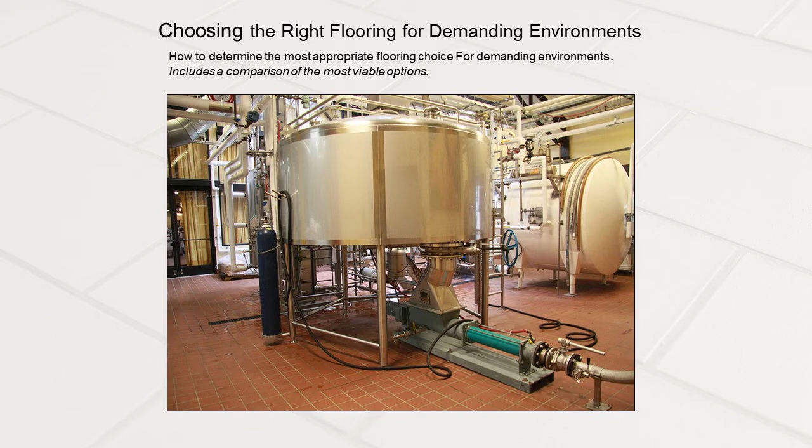So we'll get rolling. Metropolitan Ceramics, we've been around since 1866. We originally made paving bricks that have been known to be installed in the Indianapolis Motor Speedway, hence the Brickyard. We were one of the original vendors that provided paving bricks for the Indianapolis Motor Speedway. So we have a long history in the ceramic and brick making industry. Most recently, within the last half century, we've been making quarry tile.

And we're talking not only day in, day out foot traffic, but you're rolling carts across it. When we reference extreme temperatures, we're talking in and around fryers, in and around heat, in and around ovens, in and around cold and frozen storage areas as well. Needless to say, these areas are going to have a lot of moisture, a lot of wetness. It's just basically a very slippery environment.

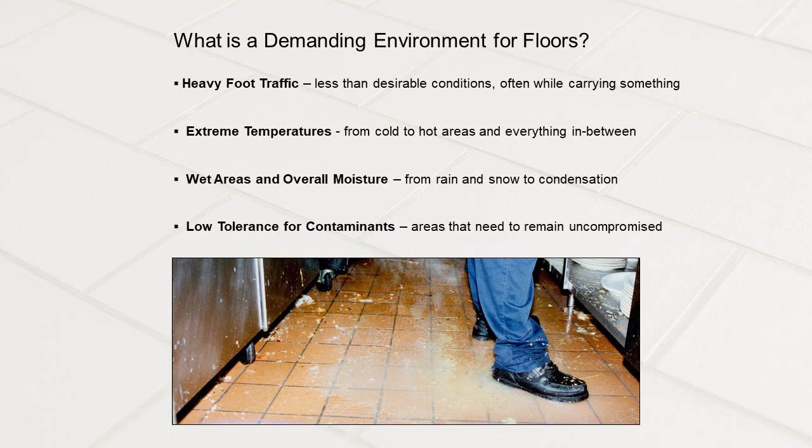Heavy industrial traffic, exposure to spills, must maintain an acceptable appearance overall. You want something that the customer is going to look at and basically say, that's not going to make me throw up or make this particular meal I'm eating that much less desirable. But as far as heavy industrial traffic, we're talking machinery rolling across it, heavy carts with casters, metal casters, rubber casters.

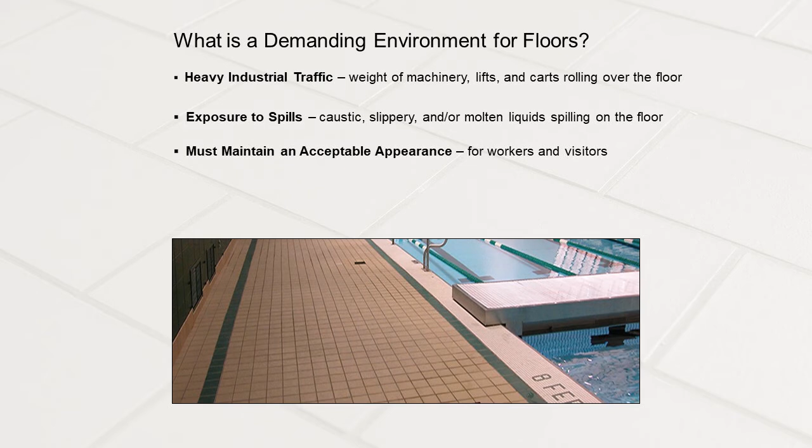This particular picture is a pool at Marshall University. And not only what's rolling across it to change out for events, but you have the contaminants of what's used to clean the pool, a pool deck, so it's exposed to bare feet. So you want something that's going to be extremely clean and extremely health conscious as well.

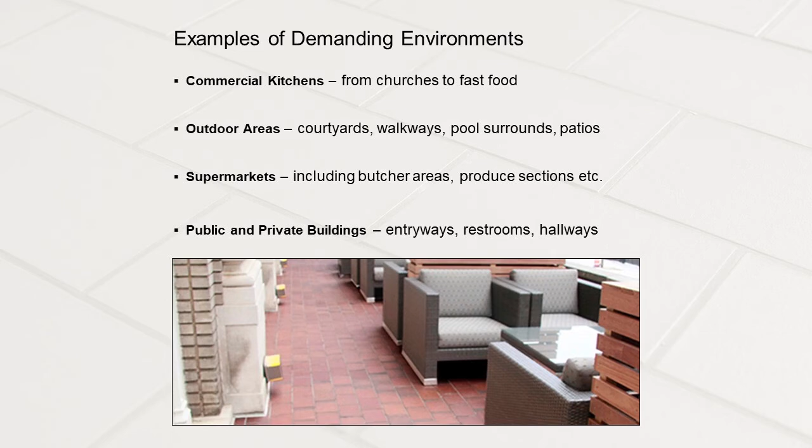Locker rooms, industrial applications, dealerships. Car dealerships, not only in the showroom areas, but the service bays themselves are very demanding environments where you have not only spills of oil and grease and other contaminants to clean, but you have cars and heavy traffic rolling across it. Locker rooms and restrooms as well. Schools and universities primarily use a quarry tile, or some type of ceramic, because of the durability of it overall.

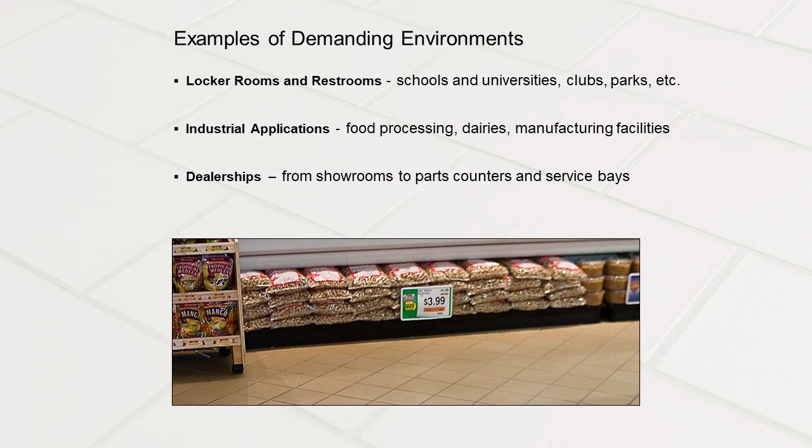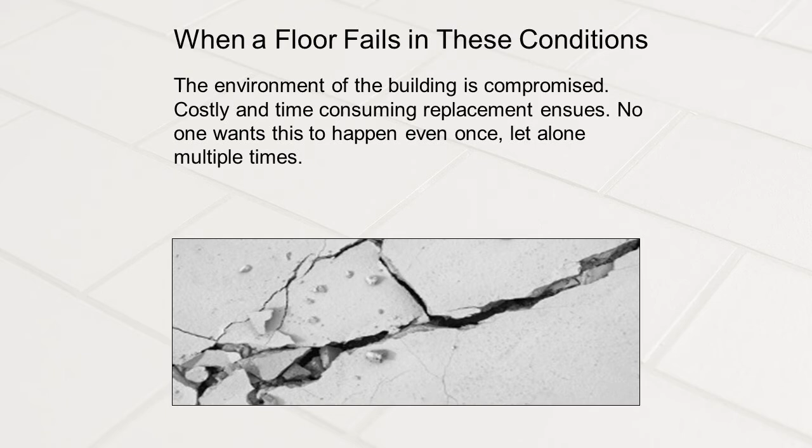When floors fail, you have many issues that happen. When a floor is compromised, either by way of the concrete itself underneath or something falling on it, you want something that's going to be as durable as you can get. This particular picture is basically a picture of a spalled piece of concrete. And this can happen with something falling on it or the fracture itself coming up from underneath.

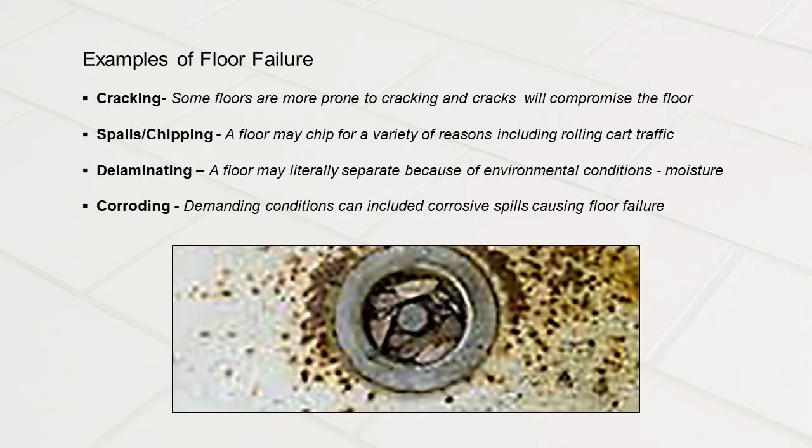Melting, surface wear, discoloration, and tearing mostly and primarily have to do with vinyl or rolled-on products. They rarely have to do with ceramic tile. So that's something that, again, is one of the benefits of ceramic tile.

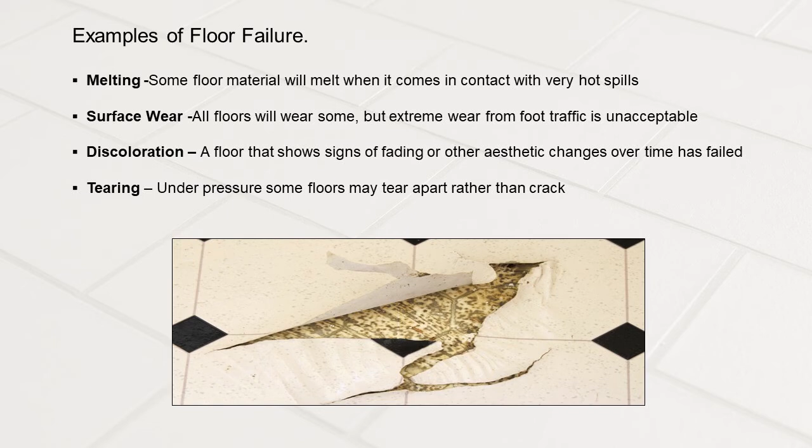The most successful floor that will not be compromised and will provide decades of service is primarily a ceramic tile. And this, of course, is in reference to a quarry tile, but most ceramics will hold up to heavy foot traffic, surface abrasion, contaminants, heavy carts, wet areas, as well as extreme temperatures. And again, the primary basis of this is how the product is made, as far as quarry tile or tile itself.

So again, the skin itself needs to maintain the integrity of basically shielding and insulating the inside. And again, the best product for this has been ceramic tiles, and it had been used on the space shuttle for years.

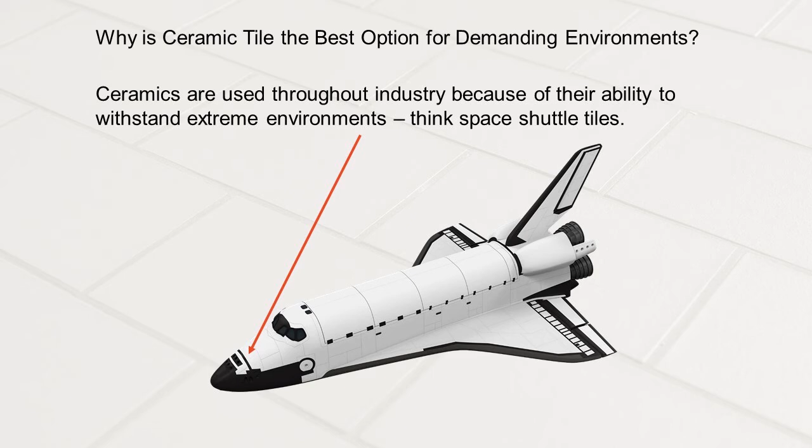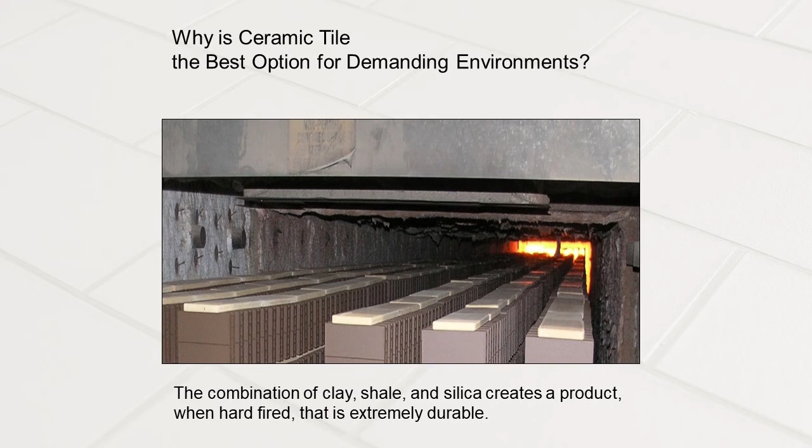This kiln itself is about 120 yards. It takes 30 hours to process the quarry tile as it goes through the kiln, 12 hours to dry it, and then 18 hours to bake it. And in that 18 hours, it hits peak temperatures of about 2,000, 2,200 degrees. So basically, you're firing out all moisture, all impurities, and making it a very sustainable inert product.

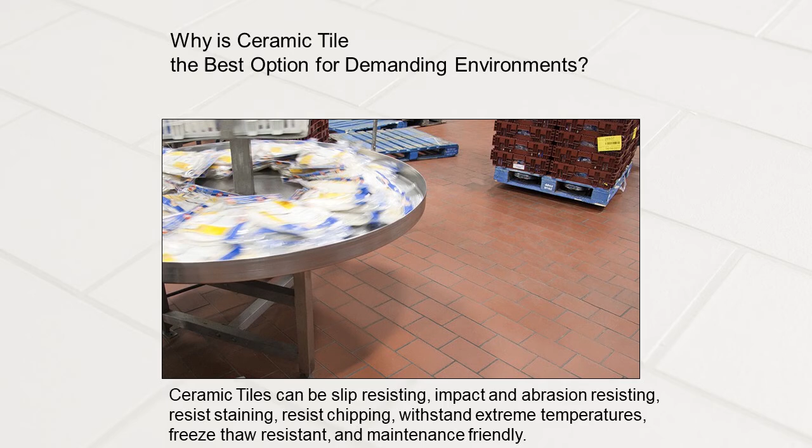What other options are out there that people use for demanding environments? We see these every day, and we see these fail every day. But we also see them last, but also have other concerns with these things every day. A couple other options for demanding environments include vinyl tile.

I know many of the members of the FCICA, if not all, install, promote, and maintain vinyl tile, VCT, LVT, other vinyl flooring, other products that are other than ceramic. And I'm not going to beat up on these too much, but basically I'm just throwing you the facts out there as to why I have concern with longevity and how it can get

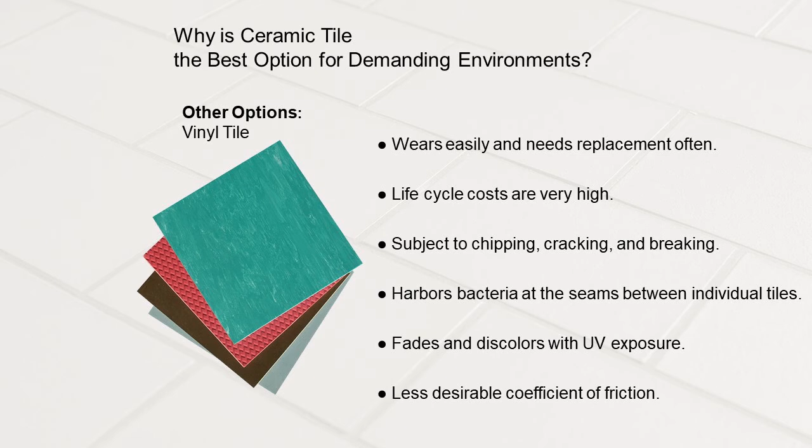So if you have a fracture in that slab, the most apparent place it'll come up is through the tile itself. Slip and falls are also a concern with this, and that also has to do with the maintenance of it. With the wax that's used, you need to put 3 coats of wax on it right away, and again, the maintenance of that is a long-term concern.

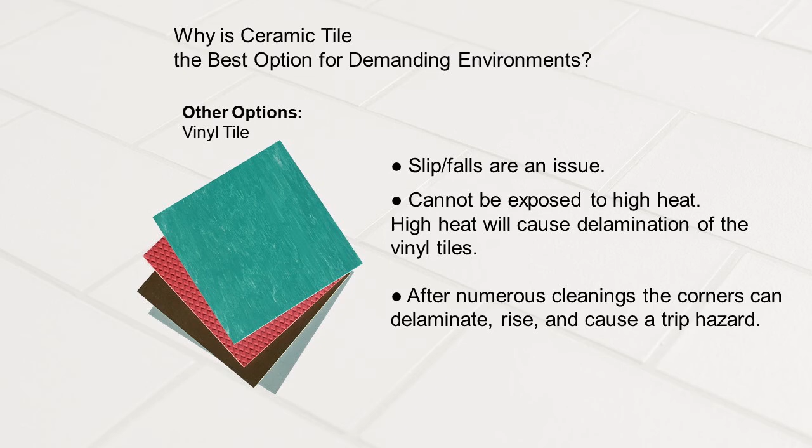Other products used for demanding environments are poured epoxy or poured flooring, if you will. There are some urethane flooring products out there that are poured on, troweled on. They look great. They're seamless. You don't have a lot of issues with traffic and things rolling across it, but it will show some wear patterns. Once it tears, you can expose the concrete.

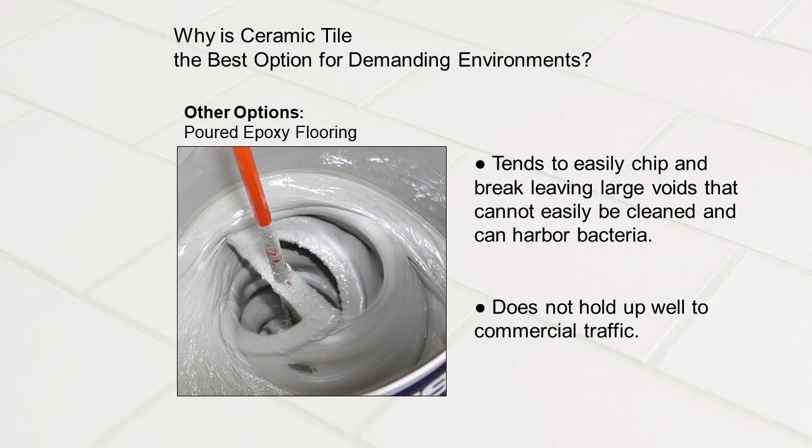And the products that are generally used to fix that concrete and to repair any issue are toxic. And in toxic situations, you have to remove all flooring or all food products, especially in the commercial kitchen. You have to remove all food products and maintain an area that is extremely clean, and it's very expensive to repair an epoxy floor.

As far as other products that have been used for demanding environments, poured concrete. We see it every day where someone's using poured concrete in the commercial kitchen, and many health codes will not allow that. In today's world, as health codes change to basically finish projects and open doors, many times poured concrete is used, and basically you're relying on the sealer itself to maintain it. You're walking on the wear layer itself, and it can fade.

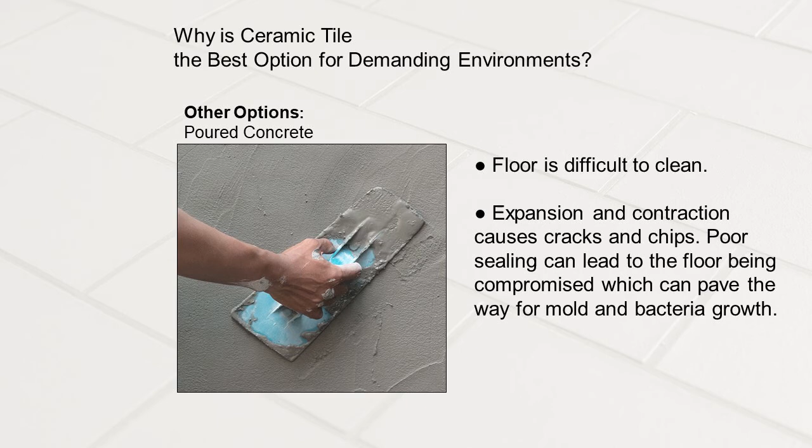The sealants, the curing compounds that are used for poured concrete, range all over the board, and it actually has to do with how it's applied. Again, to emphasize, the health departments generally do not want poured concrete or exposed concrete in a commercial kitchen, but we see it skirt by; it happens a lot.

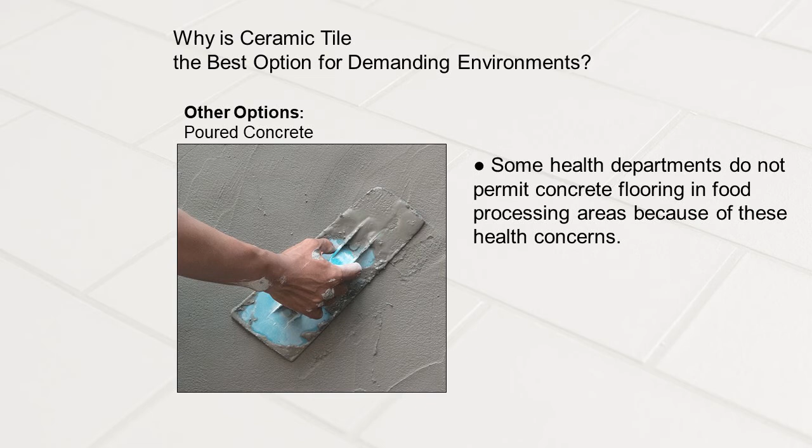And not to point any fingers at any particular restaurants, but in many municipalities, they say as long as you have a surface on top of it, you're okay, but that surface can also promote growth of bacteria from what's below it, which is a major concern.

Not all ceramic tile is made for demanding environments. There are many ceramic tiles out there that have a light glaze on them. The body of the tile itself, for instance a 4x4 white wall tile or white body tile, is generally a talc-based product, and the glazing on it is generally a finished glaze, and it is not the best product for a commercial kitchen, needless to say, or for a demanding environment.

And again, there are even some porcelain products that have a superficial glaze that is not best for a demanding environment. Roller traffic is a primary concern with that type of product; roller traffic can basically let the glaze fall off. So not all ceramic tile is made for demanding environments.

Bottom line, the most economical product, the best for durability and longevity, because it is primarily an unglazed product, and a lot of people refer to ceramic or quarry tile as burnt dirt. It's primarily shale and/or clay with a combination of some other products to maintain color and consistency. But the burnt dirt product called quarry tile is the most durable, long-lasting product for demanding environments.

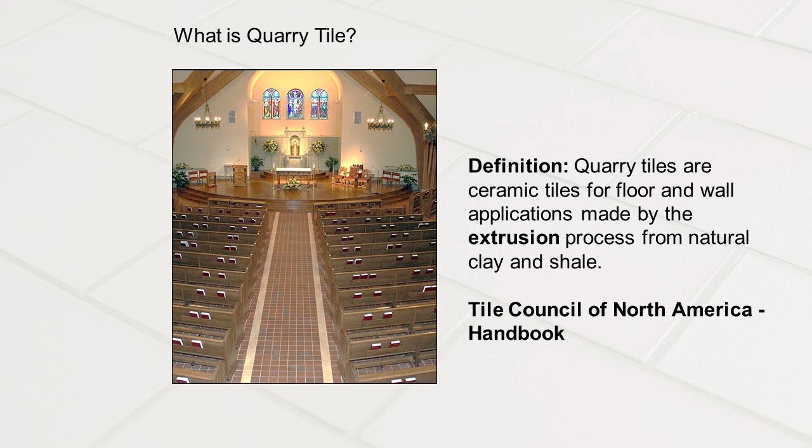What is quarry tile? Quarry tile has nothing to do with the product being quarried from the earth. Quarry tile itself is by definition an extruded product. The Tile Council of North America handbook references quarry tile as extruded. We'll talk about the extrusion process in a second, but it's primarily from natural clays and shales.

The Ceramic Tile Institute of America also defines quarry tile as usually a 6x6 product, usually half-inch. There are some 3/8 and some 3/4 inch quarry tiles. But again, the bottom line, it needs to be an extruded product.

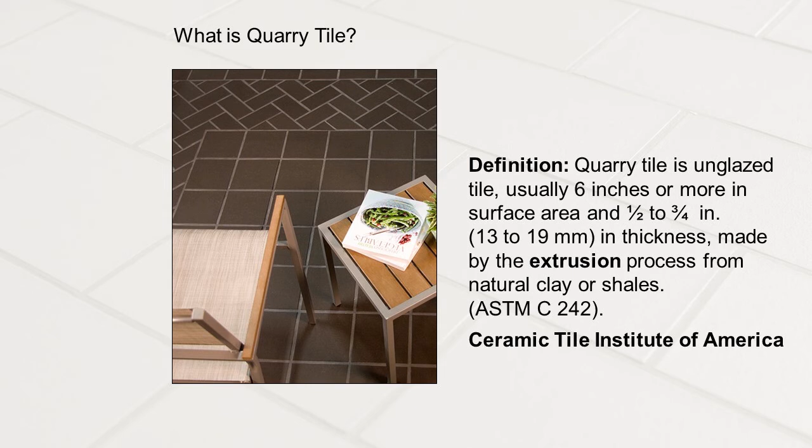And Wikipedia, we always reference our friends there. But as far as Wikipedia, again, the extrusion process is what quarry tile is. It's, again, 1/2 inch to 3/4 inch. The traditional size of quarry tile is 6x6 by 1/2 inch. We at Metropolitan Ceramics make a 4x8. We make an 8x8. We also have the ability to make other sizes. We have a 4x12 in this particular line.

We have a 6x9. And what we also can do at Metropolitan is we have the ability to give it different textures, which kind of separates us from others within the quarry tile business. We're very, I wouldn't say flexible. You don't want to use the word flexibility when it comes to ceramic tile, but as far as what we can do and how we manufacture, we have many other options to choose from than just your day in, day out 6x6.

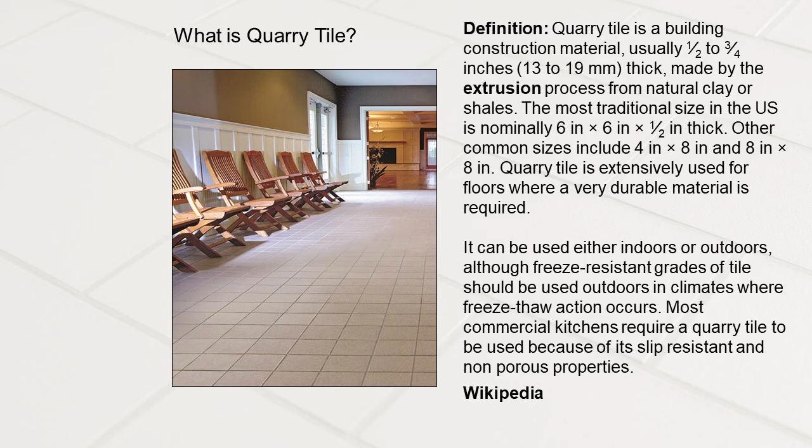Quarry tile, not just for kitchens, it can be used anywhere, any demanding environment. Needless to say, the commercial kitchen comes into play. If you have hallways, I can remember a long time ago in high school, we had main corridors in the building that was built in the 1930s that had quarry tile down, and it's still maintained. It's still in there, and it's still in one piece. So it's a very, very durable product.

Again, the process for making quarry tile, it's about 30 hours in the kiln. So it's a slow, methodical process, but it's the most efficient way to manufacture large runs of product and to maintain consistency. And like anybody in the flooring business, no matter if it's vinyl or whatever, consistency and size is what's very important when it comes to install. All quarry tile needs to meet ANSI spec A137.1. That's the standard across the board, so all manufacturers must meet that.

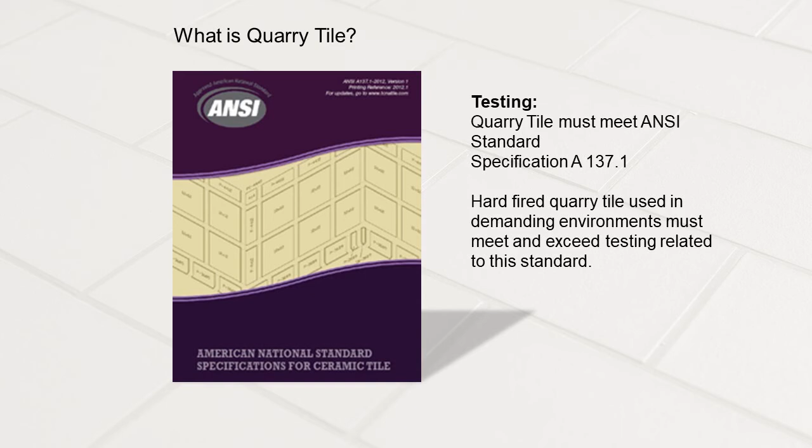One of the biggest concerns with any kind of flooring, especially in any commercial kitchen or any demanding environment, is slip resistancy. Coefficient of friction is the staple that all commercial ceramic tile products are measured by, which is kind of a tough thing to get the same information, dynamic coefficient of friction, from vinyl and or LVT products out there that say they're commercially rated. It is a struggle, or requires some type of separate conversation with your rep to find out what the slip resistancy or coefficient of friction is of vinyl. They're not forthcoming with this information. It's pretty well hidden.

With quarry tile, it is how our product is measured. It is the dynamic coefficient of friction, which is the standard today. 0.42 is the threshold, and all Metropolitan Ceramics products measure at 0.6 or above. And this dynamic coefficient of friction, again, is the new standard. It is measured by this little machine called the BOT 3000.

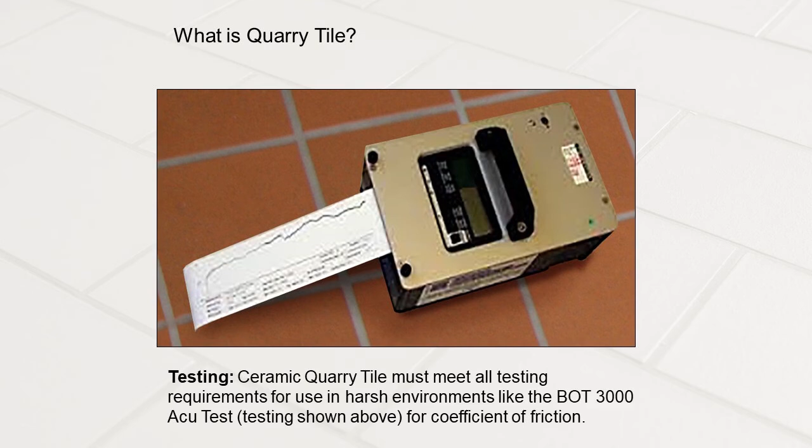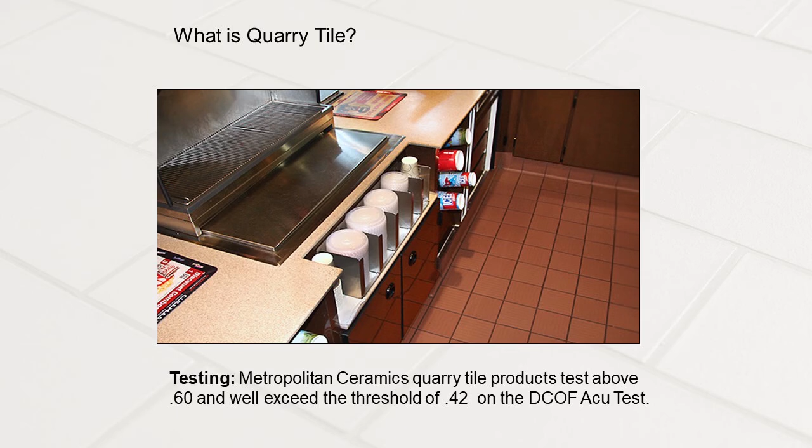Sounds kind of cool, but that stands for Binary Output Tribometer, and it basically measures the coefficient of friction, both static and dynamic. It's a portable machine that is generally used, especially when there is a slip and fall issue, that can be brought to any job site to test the floor. The test, again, that's where we talk about 0.42 as the standard, and all Metro products are 0.6 or above.

When it comes to any kind of specification for any commercial product, these are the main points that you want to look at, especially with ceramic tile: break strength, freeze-thaw stability, your coefficient of friction, dynamic and static, and how it classifies as far as chemical resistancy. You have many products out there, especially in the vinyl industry, that are nice products. They look clean, look great, but need to be maintained with a wax or some type of sealant. And what chemicals are beating up on that? What chemicals are compromising that surface?

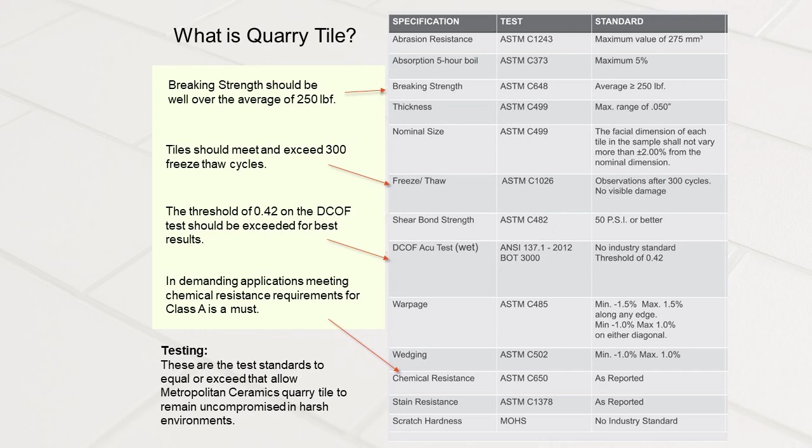Generally, with ceramic tile, especially quarry tile, if you are sealing it, it is some type of water-based or solvent-based penetrating sealer, but it will not affect the slip resistancy integrity of the quarry tile itself. So quarry tile, as it's installed, can always be brought back to its original state, whereas you can't say the same for vinyl products out there, or for that matter, even epoxy or poured floors. Again, why quarry tile? The slip resistancy, low absorption. Quarry tile itself is considered a vitreous product, between 1% and 3% absorption.

Anytime you get below 1%, you're asking for hydroplaning or a very slippery surface. Most porcelain products that are out there are considered less than 1%. And again, Quarry Tiles are manufactured to be vitreous, between 1% and 3%. And that little absorption itself helps maintain the integrity of the slip resistance.

Our Quarry Tile has relieved edges, or cushioned edges. This will help in maintaining the integrity of the floor for the life of the floor. If something falls on it, a squared edge product or rectified edge is more susceptible to break, whereas our products with their relieved edges are a little bit more soft. It takes much more of a blow to chip it. So the relieved edges provide a better, longer lasting product.

The extrusion process versus pressed. With the extrusion process, again, you're looking at consistency, and the pressure that's put on the clay as it's going through the extrusion process helps maintain the integrity of the body of the tile.

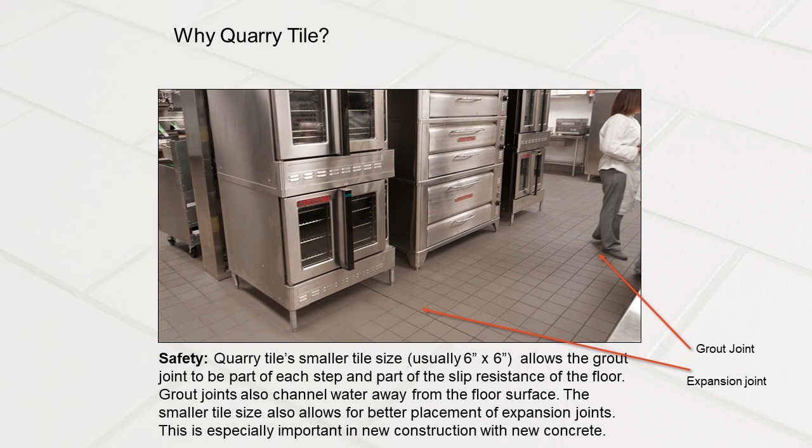And with the modularity of the 6x6 quarry tiles, it makes it that much more beneficial when installing it, because generally if it is every 6 feet or every 10 feet, you can install it with 6x6 quarry tiles. It'll be within a grout joint, so you wouldn't have to saw cut it through a piece of a full tile. So the modularity of quarry tile comes into play with that.

Aesthetics isn't the only thing, and I hate to throw that slide at you, but slip falls are a huge issue when it comes to commercial kitchens. For insurance companies, one of the biggest claims against any restaurant are slip falls. And not only slip falls from customers, but slip falls from employees.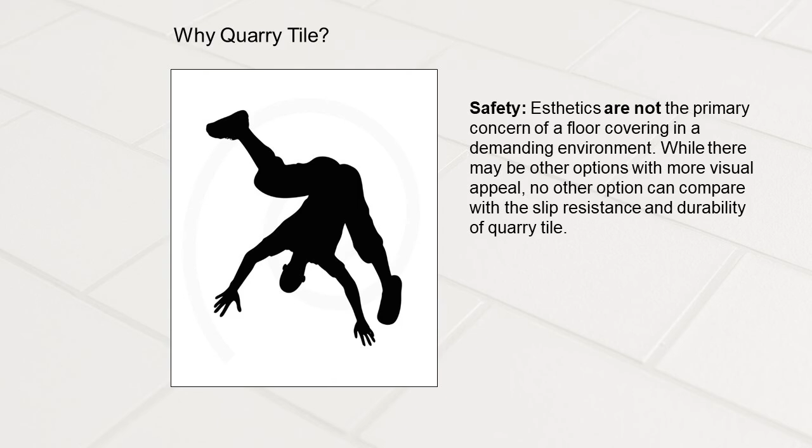Slip falls have to do with when, say, an employee's walking through a kitchen, and not so much his health and safety, but as he's slipping and falling, his arms are flailing, if you will. Not that I want you to picture any of this, but he's reaching for something or grabbing something, and it could make somebody else slip. It could hit a hot fryer. It could hit a pan of some sort. So it's a very dangerous thing as far as what slip falls can lead to.

There are some health concerns in health and hygiene. There are some municipalities in the country that require quarry tile in their commercial kitchens just because of the health and hygiene issue. Food codes, because it is a very cleanable product, it's the most maintenance-friendly product there is, but again, it still needs to be maintained. Some municipalities require a finish on the floor, and when it comes to overall cost and durability, quarry tile is the most widely accepted standard for health and hygiene codes.

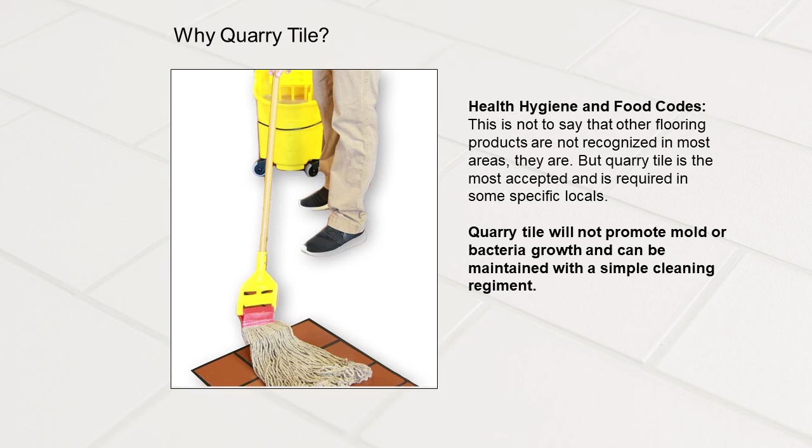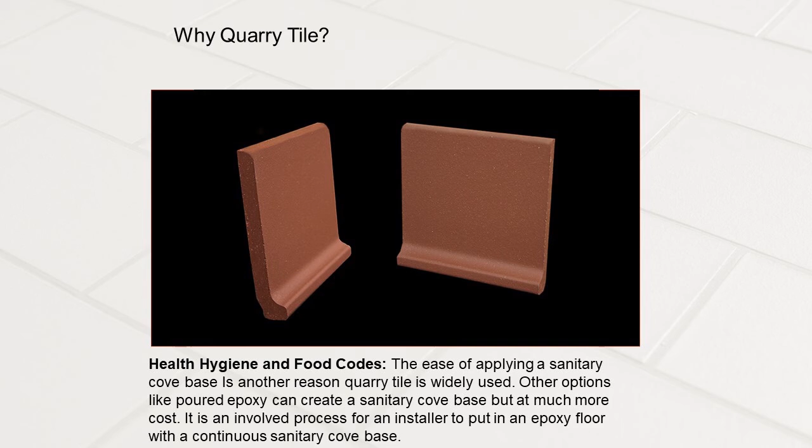Concerning health and hygiene codes, most of our products in our Quarry Basics line have trim available that is considered a sanitary cove base, which means the front leading edge leads to the surface level of the floor itself, and that becomes a sanitary cove base. That's something that is required in many health codes.

Our manufacturing facilities are in Canton, Ohio; we've been there since 1866, a long time. The clays and shales that we use for the manufacturing of our product come from within 30 to 40 miles of our facility, and it's truly a Midwestern product. We take pride in the fact that the clays and shales that are close to us help us keep the cost down and make it a viable product.

This is a picture of a bin of dirt, and it is a bin of either shale and or clay. Basically what we're doing with it is that we continue to rotate it, keep the moisture in it, and it's something that you have to maintain the integrity of the product. An old saying in the brick and tile industry is that as far as raw materials, you can only mess them up, basically. And I'm being sheltered by my slide here, but the integrity of the raw material itself will help promote the integrity of the tile itself.

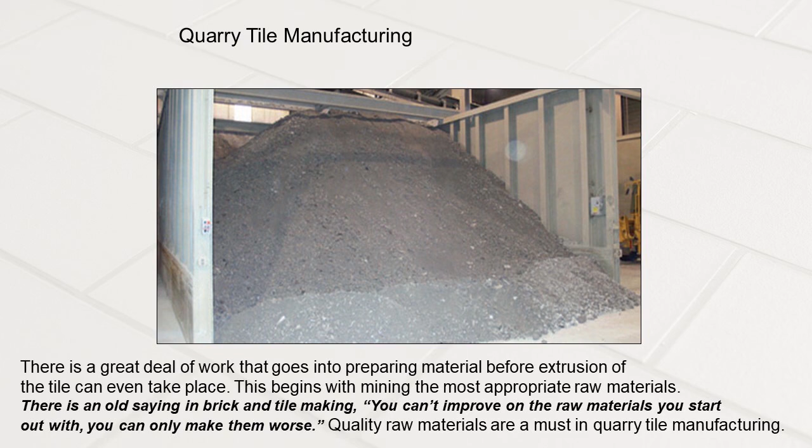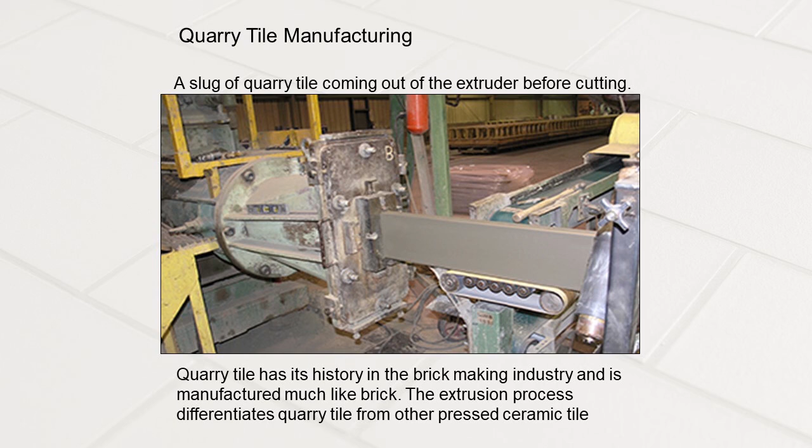This is a picture of our extruder. Basically, think of this as the front edge of your Play-Doh maker, the front edge of your pasta maker. So whatever shape that die is, that machine gets very, very hot because of the pressure involved. We're squeezing the clay and pushing it through there, and that is one continuous noodle of clay coming out of that extruder. And then we slice it up on end, stack it on end, and bake it. So the integrity of the product itself has to do with the die and our extrusion process.

As a maker of ceramic tile, we are basically expediting what the earth does with stone or rock. Stone, rock, limestone, marble, granite is all pressure and time, and the raw material itself, which is basically dirt and lava and molten product. What the earth has done to make granite and marble is the immense pressure that's put on it, the heat involved, and time.

What we do as a manufacturer of ceramic tile is we expedite that by pushing it through a die and through a kiln. We're taking that clay or shale and expediting it by firing it through a kiln. And that's the same process as any other porcelain manufacturer out there. That's what a ceramic tile facility does, just expedite what the earth does day in, day out.

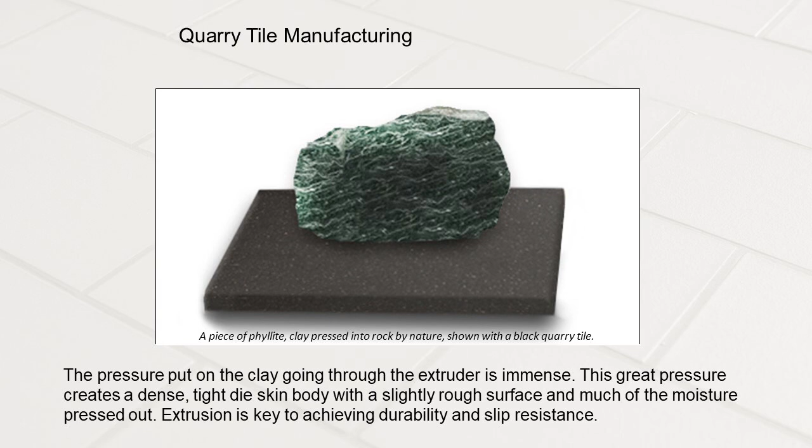So as our ceramic engineers make their hay with us, that product not only has to shrink horizontally but vertically at the same time. So like any other product out there, squareness comes into play, and this is where we have to maintain controls as far as how we're slicing this up and how it's baked.

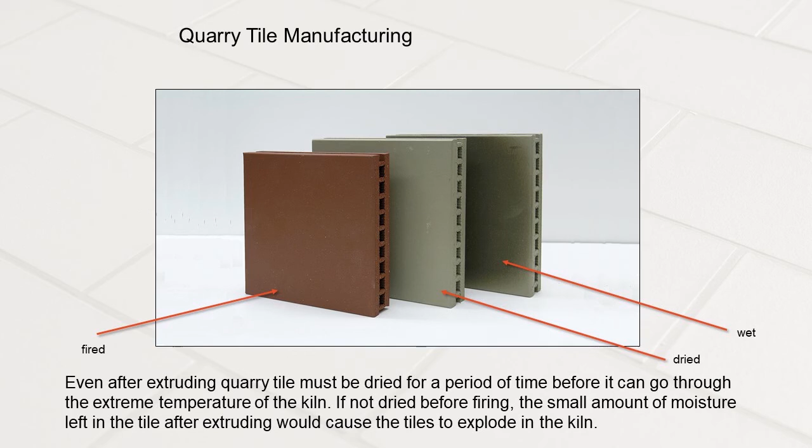As you see, these products look like they have some holes on the end there. We make two pieces of quarry tile at the same time. So this tile, after it's fired, is split with a machine that basically taps it off center, and the pieces in between that are holding it together are recycled. So we are using 100% of the body in the manufacturing of the product. And again, the kiln firing is around 2,200 degrees, about the same heat that lava emits. Pretty hot stuff.

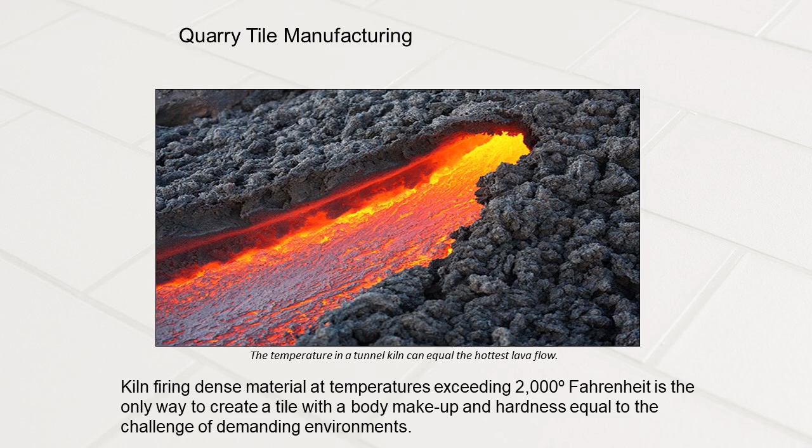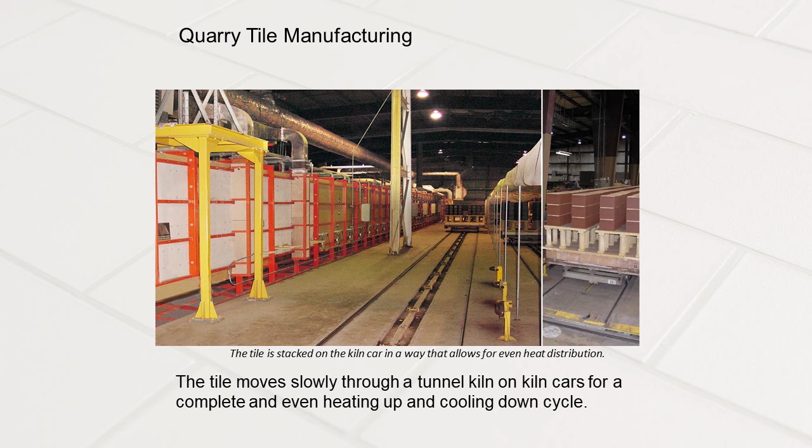The last handful of slides is going to be a comparison of the 3 products primarily used and specified for commercial kitchens: quarry tile, textured porcelain, and pressed pavers. You'll see there are a lot of similarities between the 3 as we go. And the last couple slides will recap why quarry tile is going to be your best option.

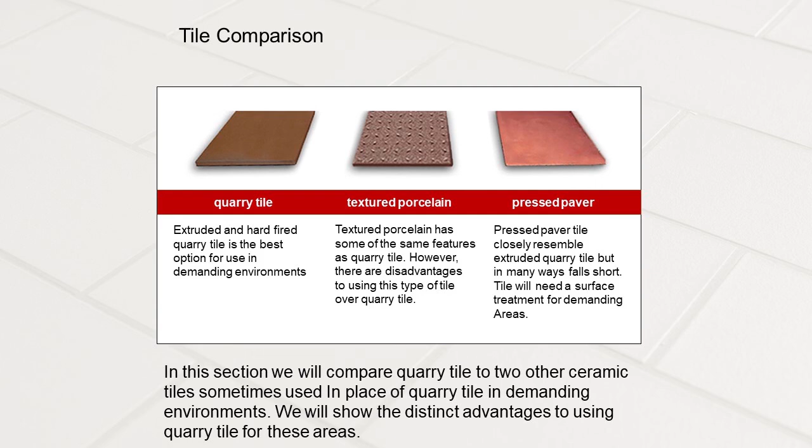This is a tile just going through this, the surface itself and how it's made. Quarry tile is extruded. Textured porcelain is pressed, and needless to say, so is a pressed paver. The thickness of it as a whole: quarry tile generally is ½ inch thick, although there are some 3/8 and 3/4 inch product, but generally the accepted standard or norm is ½ inch thick product. The textured porcelain is generally either 1/4 to 3/8 inch, and rarely does it get thicker than a 3/8, and same with the pressed paver.

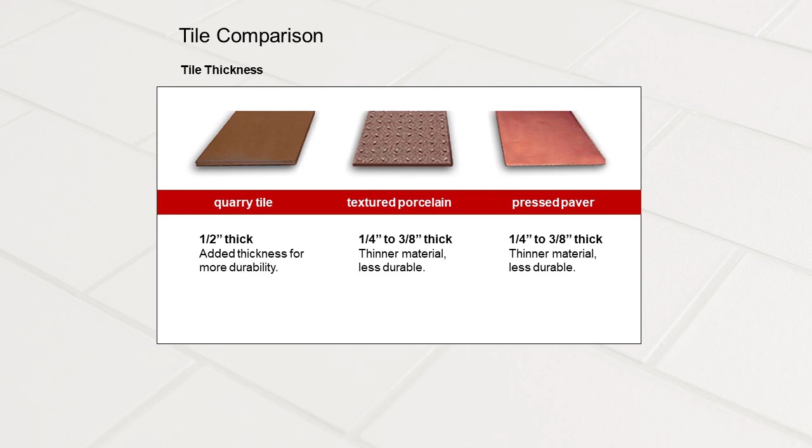So just the perception itself of a thicker product being more durable comes into play. The extrusion process itself gives it an orange peel type texture. So basically, as it comes out of the extruder, and then after it's dried and fired, it has a very subtle texture to it, comparable to an orange peel. That gives it some slip resistance right off the bat.

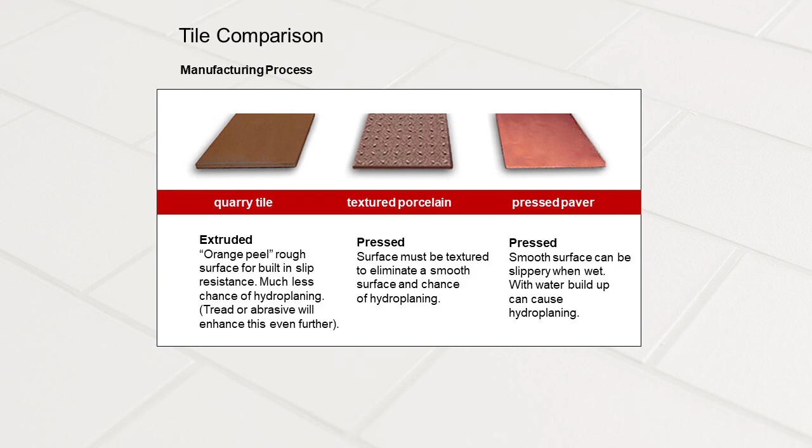With a pressed paver or the textured porcelain, you're basically impressing a texture into it, which is generally like a grid or some type of star pattern. And then a pressed paver is basically a smoother finish that will require some sealing, but the smoothness itself contributes to hydroplaning.

The water absorption itself, again, across the board, they're primarily all vitreous. Quarry tile with the texture gives it that much more slip resistance, but as far as how they're classified, they are all classified as vitreous. The pressed paver is on the lower end, if you will, closer to 1%, which again can contribute to some hydroplaning issues.

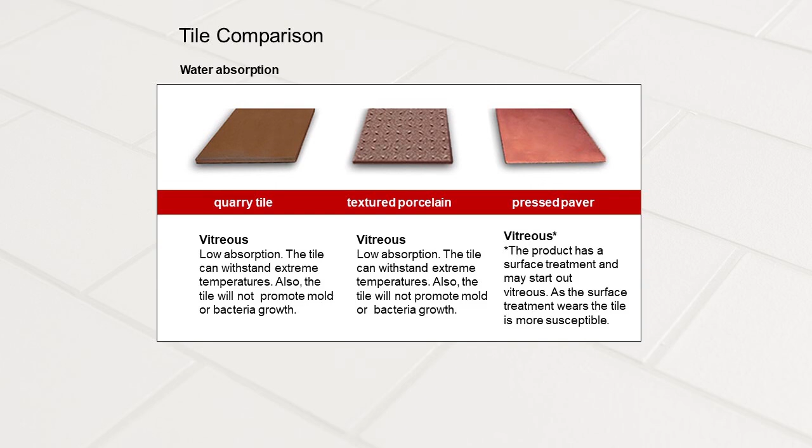The body composition itself, the tight die skin, if you will, of the quarry tile gives that orange peel type texture. The highly pressed, very tight body of the textured porcelain and the pressed paver can contribute to hydroplaning, and it can be a very slippery floor. The textured porcelain is given a texture to help maintain some slip resistance as a whole, but that's the reasoning for that.

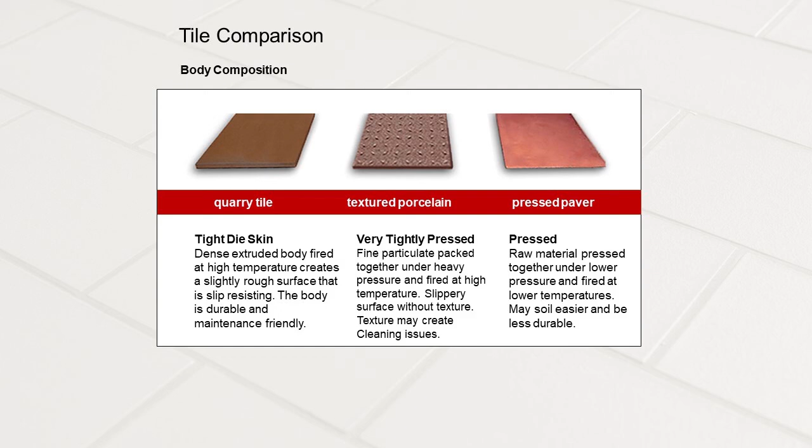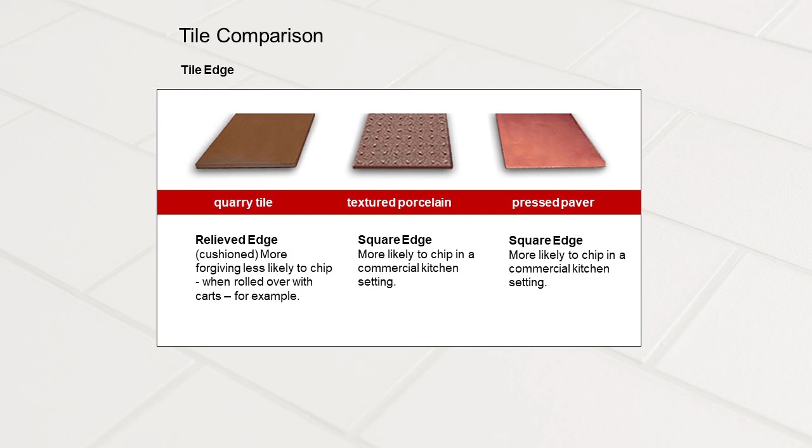The edge itself: as I mentioned before, quarry tile has a relieved or cushioned edge, which can help maintain the integrity of the floor as a whole. It will last a long time. A squared edge product is more susceptible to chipping, especially when installing and in its use. And with the squared edge pressed paver, you can get that same thing where you have a compromised edge that is that much more brittle.

The price point itself, economically speaking, quarry tile is at the low end of the spectrum when it comes to just the tile itself. With textured porcelains, needless to say, given the processes it takes to make them, the clays and shales used are very similar in both pressed paver and textured porcelain. That gives it a tighter body, but generally makes it that much more expensive. It's a more expensive product to produce, package, and install.

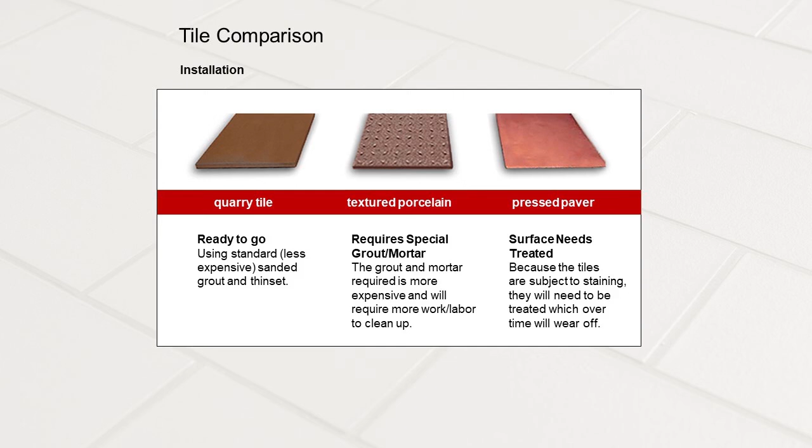For installation, with quarry tile you can use just a standard day in, day out mortar or grout. Any textured porcelain or pressed paver, you'll need some type of modified mortar to install. There are very few natural pores in a pressed paver or textured porcelain, so you want the mortar to grab hold of something. So you need a modified mortar to make it that much more tacky, basically for much better coverage, which again can be more costly. The day in, day out standard mortars and standard grouts, that's what you can use for quarry tile.

The grout itself: the recommended industry standard for all eased edge or cushioned edge quarry tiles is a 3/8 inch joint. Grout people love to hear us say that, but the 3/8 inch grout joint has to do with channeling moisture and water, and it helps give the overall slip resistance. With a smaller grout joint, like 1/4 inch, you don't have as much traction, and the 1/4 inch can actually emphasize any irregularities with a textured porcelain or pressed paver.

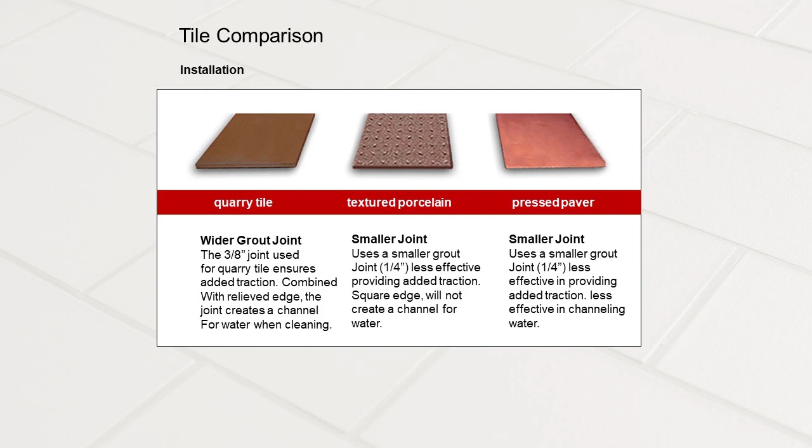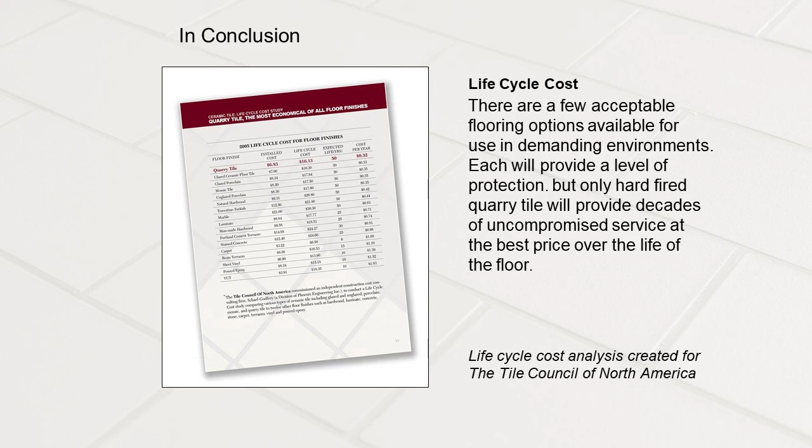One question came up as to can quarry tile be used outdoors in hot and cold climates? And yes, day in, day out. No matter what product Metropolitan makes, it can be used inside or outside, floors or walls. Because it is a vitreous product, it is freeze-thaw stable, and again, the integrity of how it's installed will have everything to do with the longevity of it. But all Metro products are stable inside or outside.

And Lizzie, I don't know if you want me to roll through answering these questions, or if there's anything else out there that you may have. No, you can go ahead and answer the next question that's sitting there.

Okay. Are there many color and size options? Metro has 10 different colors in our day in, day out Quarry Basics, available in 6x6, 4x8, and 8x8, all modularity and sizing. We also have the ability to give it different textures, so there are some products out there that have a texture to it. And again, any of these can be used inside or outside, floors or walls.

The trim available with all of our products makes it a very usable product for outside steps, for wrapping a patio, for up and down a walkway, as far as a residential application. We've had a lot of call lately of someone having just a concrete slab. Instead of tearing it out and putting in new pavers, you can just go over the concrete slab with tile. And especially with quarry tile, it can be used to basically spruce it up.